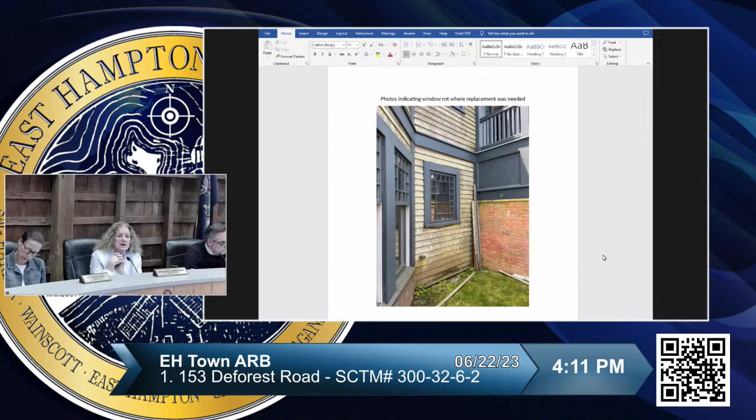The other piece of this that seems a little problematical is the patio. They're proposing to replace a brick patio with limestone, and it appears that that may be within the wetlands setbacks and may require a natural resources special permit. The property card seems to indicate that one has been granted in the past, so I think that's pretty much an administrative matter for the ZBA. But please come up and tell us what you've got.

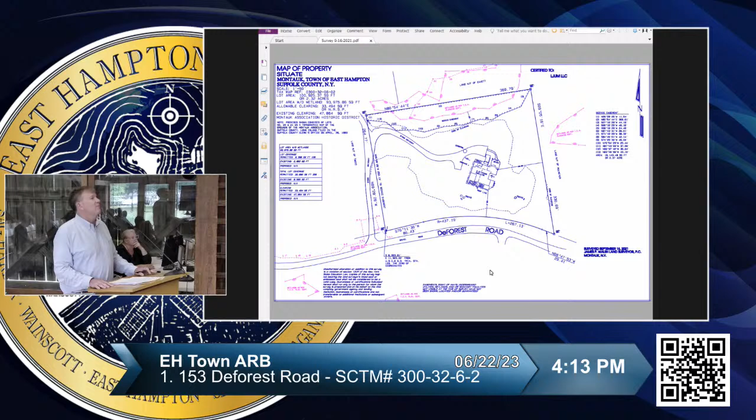It's inspiring in its own way. Just from learning from him and some of the other people, it's a very active area of architecture study even today. You're dating back to the 1920s and thereabouts, and it's still very, very active right now.

As I mentioned, Alan was very into classicism architecture, and he really revered the original designs. He had thoughtfully redesigned the house to be truer to the original vision of the architects as he understood it.

This property did have some extensive additions to it. They were done when the property was owned by Roberta Gosman Donovan, who was a former chairman of the planning board and probably other things, actually, when I worked for the town. I think the architect at the time was a guy named Francis Fleetwood. His firm is still up the road.

I recall Alan Greenberg had great regard for Francis Fleetwood, but he didn't like what the additions to the property had done. Essentially, the original vision of these properties is that the south-facing elevation, which is what you can see from the water, was going to be the banner shot -- what is remembered and revered. The north-facing elevation was designed in all the houses to be relatively plain.

If you look at it now, the pictures that you took show a lot of the additions and some of the features that were added. I personally think it looks beautiful, but when you start talking about classicism architecture and how it relates to the original, there's a lot of room for discussion on that.

As a matter of fact, I seem to remember Alan at this meeting said it looks gingerbready, which I didn't know was an architectural term, but I guess apparently it is.

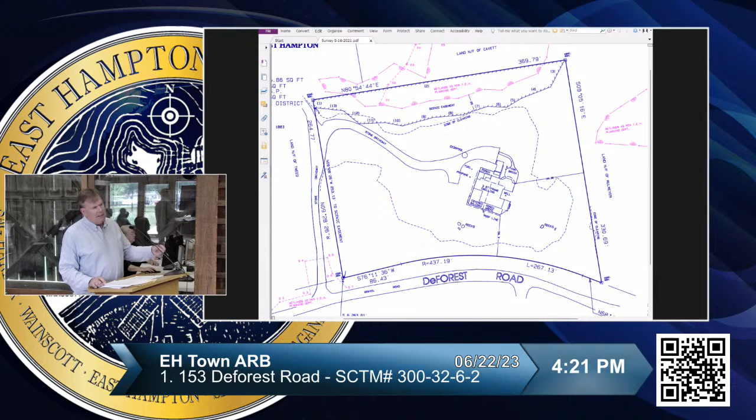The doors are all replaced, all non-historic, meaning they date back to 1992. All of the original windows and features on this building remain exactly as they were from 1992. I suspect some non-historic windows were replaced in 1992 on the south-facing facade, before there was a historic district, but I'm pretty sure these windows are nearly identical to what was there, which is why Roberta Gosman Donovan wanted everything done the correct way. Bob Hefner, when he was doing the district, noted this was one of the standout houses with most of the original elements.

Perhaps the single change we propose is the removal of the railing. There's a railing on the south elevation, and that elevation is the most important for the architect's vision at the end of the day.

Julie, can you bring that picture up, please? There's a picture that shows it. I think the picture you have now shows the railing removed, but I submitted pictures with the railing in it. Is it in the plans or in the photos? Both. There might be a side-by-side on the plans we submitted. Frank, you should operate the smart board.

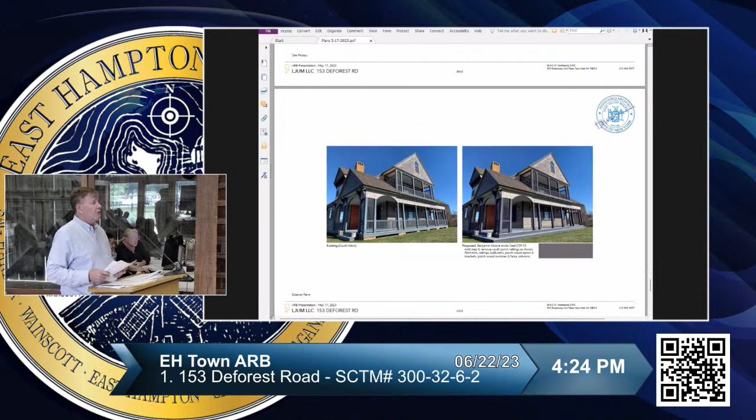So here's the side by side. That's the railing. The original balustrades were original. It's these railings that were not original, and they're proposed to be removed.

There are historical photos of the house showing that railing was never in place. The legal way to do it is by adding that step feature, which reduces the height to adjacent grade under the building code. It won't affect much since most people won't even see it, looking from the water at the south elevation. But we think it's a dramatic improvement of the overall structure and makes it more in conformance.

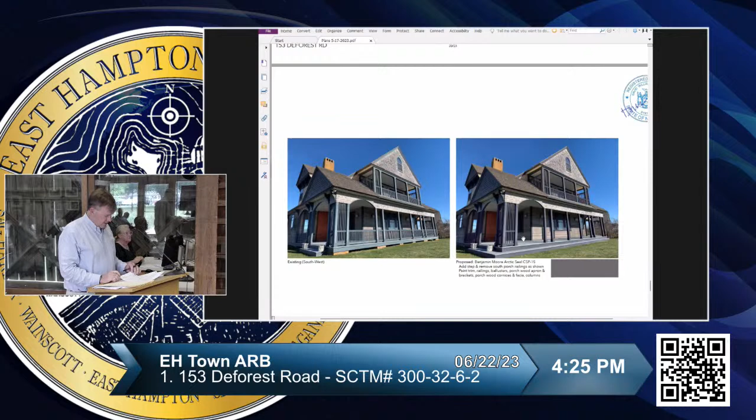Yeah, I'm trying to find it. Could you bring up the historic photos, please, Julie? I'm having trouble finding them... There you go. Yeah, so that is a historic photo of the south elevation. Can you zoom in on that, please? Because it's hard to see from here.

That's the south elevation, kind of from the east side. Yeah, it looks like they're standing on the east side. And that's from the southwest side, where you drive up.

It doesn't appear to have the larger vertical balusters. I believe they're actually white. I see a lower portion, but if you look just left of where you indicated, that other side doesn't have that taller portion.

I think this is going to the corner of the house, and you can see it here. Aren't they on either side of that entryway, beneath the gable? That would make sense.

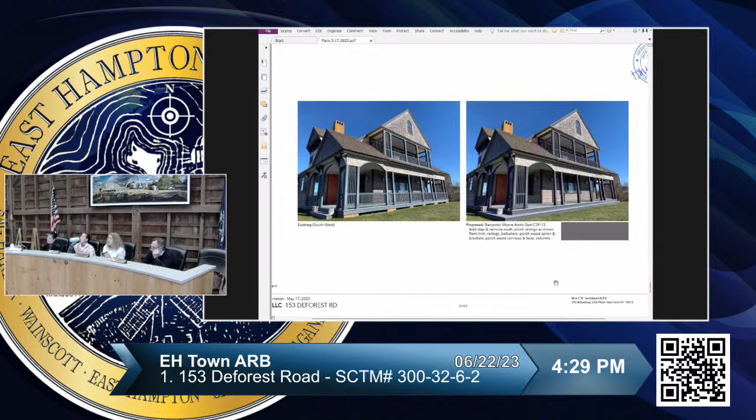I think they were lost in a fire, documented. The best source of information for most of this stuff, where we got most of these photographs, is the Montauk Library. So the earliest documentation we have of this is 1975. There has to be earlier pictures somewhere, but I didn't find them, and I don't think the town has any in the historical documents.

I like the idea of removing the lower railing, more in keeping with the historic nature of the house. Well, my question would be, what is the original? If this is 1975 and it doesn't have that spindle screen you see here, then what was the original? I still don't know that.

May I show you here? Yeah, sure. So this is your submission. So you can see this part, this element, and it's on the upper level as well. Where's the upper level here? Oh gosh, sorry, I can't see. Okay, and up here on the second story, these have... oh, she took it down. Can you leave it up please, Julie? We'll tell you when to take it down. These elements, the spindle screens, okay?

They're not in the 1975 photos. I think they are. No, look again. No, they're not there. You can see it pretty clearly on this side. There is something there, look here. There's space. I think it's coming around, and the second story shows it pretty clearly in the 75 photos.

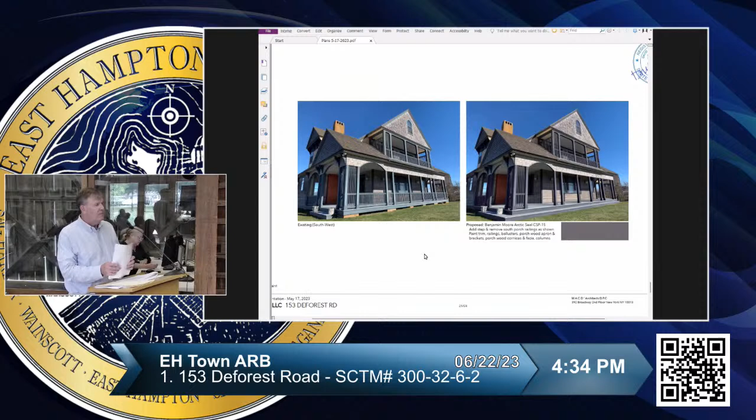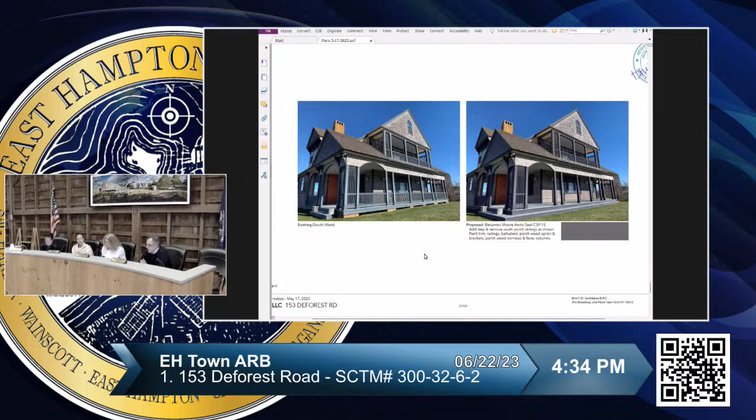Yeah, it's not that I object to what's being proposed here, it's just to make an informed judgment. I'd like to know what is original to this, and I understand the comment about the prior owner who did the renovations in '92, trying to be true to the original. I laud that, but there's no way, from our standpoint and our responsibility, to kind of verify that right now.

We're trying really hard to refine our review of historic properties like this. And the Montauk Association is probably the most important one we have, because it's still so intact and it has specific guidelines.

I know you absolutely appreciate that, Andy. On the south facade, if anything, the reason I've been told, and everybody I've spoken to said, no, those weren't part of the original construction. The reason why is because they detract from the architectural elements.

They don't add to the thing, basically these porches, and maybe we can find credence from some of the other properties. Those balustrades that you're adding detract from the clean architecture. They don't add any relevance to the structure. I think that picture that just shows the clean line without it...

I don't know about those side walls or the screen walls. I was made to understand those are part of the original concept. But once again, I don't think they contribute or diminish the importance, but removal of the balustrades definitely is something that I think is important architecturally under the district, because it does seem to be something most of us agree on.

We just need to find a starting point. So I think what we'll do is reach out to a historic preservation consultant. If it can be Bob Hefner, that's great. He's pretty much retired, so we may have to get somebody else to help us with this. In the meantime, I can get Joe Palermo's email regarding the NRSP, which was the other piece.

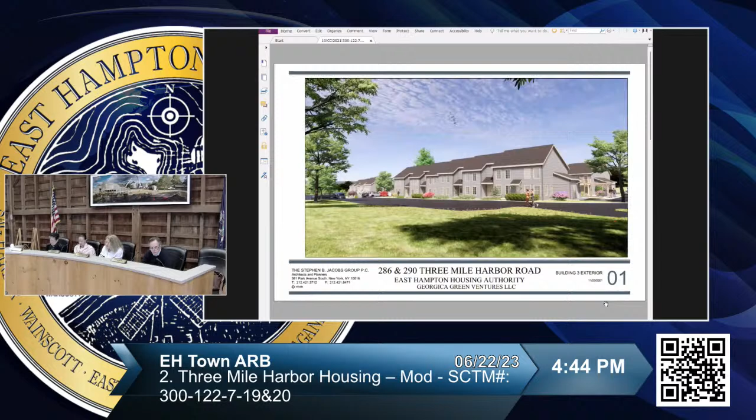So we just need to look at the proposal for the garbage enclosure, which is part of the submission we're reviewing today. Anyway, it looks like this. The approved enclosure was for a block wall with brick face.

And they're changing it to a poured knee wall with a vinyl fence. It says brown fence, so now I'm a little confused. It says brown in the submission, but Katie sent a memo that indicates this is supposed to be gray. I think if it's gray, it's okay. I'm just going to pass this to you because you can't seem to find it.

This is what they're proposing. Do you know the one I'm talking about, Julie? Can you just hold this up so she can see it? This is what we're looking for. That was in my packet. Sorry to grab that from you.

It's a very modest change, and I think it's done in part for cost savings. I think the vinyl fence in gray will actually be a little better than the brick. I think it'll blend in better with the proposed architecture.

Yeah, just show that to them. So they're proposing it in gray. This is the fencing, it looks like that. So they're going to just pour a wall, so it's a poured knee wall - basically cement, a low concrete wall.

Well, that one went simply. That's good. All right, business signs, Sunday Fun Day, Suffolk County Tax Map number 300-6-3-6.

I should say that there was no representative here from the Housing Authority because Katie and her entire board are meeting at this very time. Ordinarily, we don't entertain applications unless there's a representative present, but we did that at her request. And affordable housing projects are fast-tracked through the town's own policy, so we felt that that was cohesive and not against any of our rules. So just so we're looking consistent here.

Okay, so Sunday Fun Day, 300-6-3-6. Diane, this is you. Yes, this application is for 2 signs to adorn a charming ice cream parlor and candy store on Westlake Drive in Montauk, in that very charmingly commercial area.

Oh, you must be the - are you the applicant? I am. My husband is. Okay, well, you're the representative for the application. I am, because my son is at the East Hampton All-Star game. Oh, well, congratulations. Could you just tell us your name please? Nicole Meehan. Okay, thanks Nicole, welcome.

Okay, Diane. Yes, so the store is absolutely charming. Thank you. And this is an application for 2 signs that are in place. One is on the side of the building, with the colored picnic tables, which is very charming, and the other on the front of the building. The signs total exactly 32 square feet, which is our maximum, but they're in total keeping with the neighborhood, I think, and the space itself. I think they're very benign, and I think the spirit of the place is just perfect for the neighborhood.

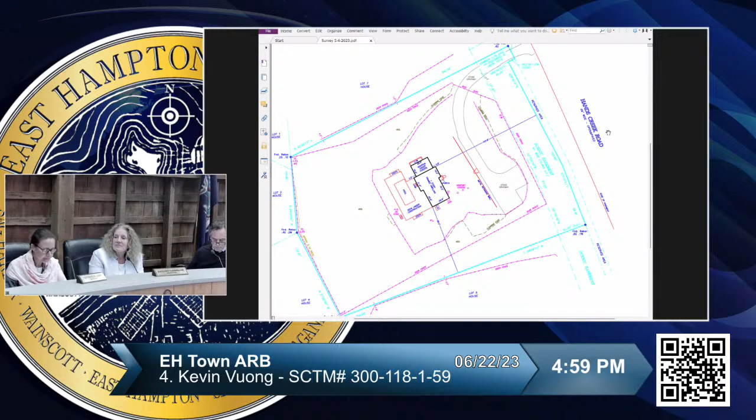All right, so that's from the middle of the road. This is the view toward the driveway and the gate, correct. You can go on to the next one. That's a picture of the fencing that's just inside the driveway gate, to the right of the driveway gate.

Sorry, so I just took photographs of not random things, but you have uplights all along some of the trees, and those are not permitted. I just wanted to make you aware of that.

Is that just on the front yard or also in the rear yard? Anywhere. Okay, I wasn't aware of that. I thought there was a limited amount allowed. Uplighting though is not, as far as I know, limited. I don't know. Well, that's my understanding, that no uplighting is permitted.

David, can you help us here? I don't know, there might be certain exceptions, but I think generally speaking that uplighting is prohibited. You could reach out to the planning department if you have specific flora and fauna concerns. I know the trees lit up look very pretty, but it does confuse the wildlife and the vegetation.

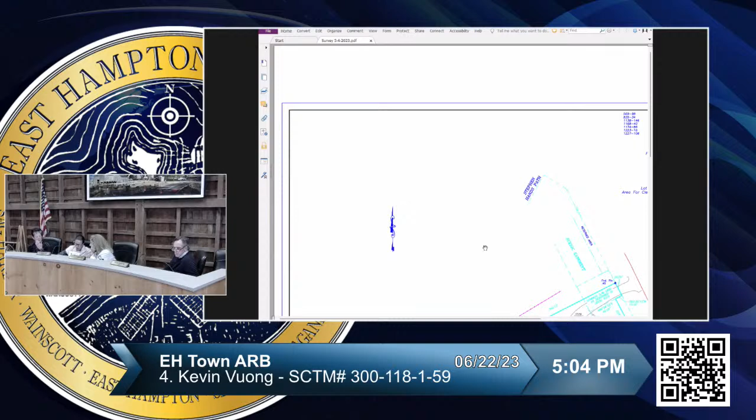Well, that doesn't make any sense. Are there any restrictions on this property? Dan, did you get a chance to look that up? I know there are approvals here. Yes, we looked through, there was an easement with the original subdivision, and it didn't have any restrictions in terms of where they were, except in the rear, nothing could be built within 30 feet except for fencing and gates.

Okay, and in terms of the scenic easement, it said as long as nothing's constructed within it, but town code just had to be 10 feet back except for fencing. The easement runs along here, so this would be 20 feet from the property line. Setback property 20 feet. Now how deep is the easement? I think 40 feet. Or no, sorry, 20 feet. So that encompasses the easement.

That approval was 2018? Apparently 2003. Well, that's long gone. Okay, Suzanne Phipps Morehouse, plastic mesh deer fence granted provided... a lifetime ago, I know. We have a fence that's 20 feet from the southeast property line. Then this is Hyatt 2018, two sheds, and the 7-foot 6-inch high fence with a setback from the southeast property line per ARB decision, and legalizing... yeah, there was a generator on there too, which I was going to ask about, but anyway, okay.

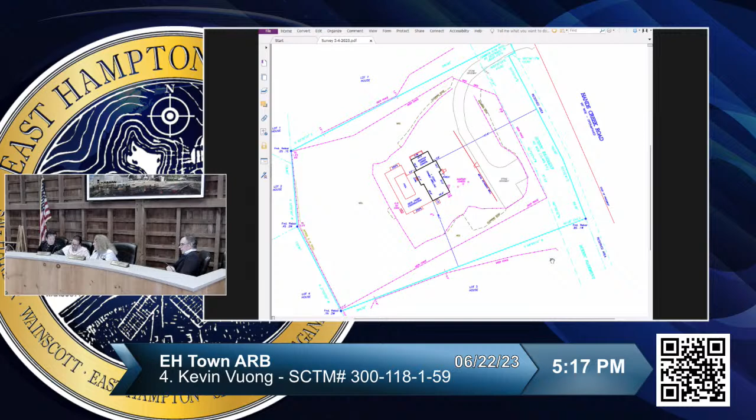This is the roadway, the gate again is -- oh, what height, right, I thought this was the edge of pavement. 6 feet, this is edge of pavement. Okay, so I'm just wondering if that's legal. Yeah, I get it.

If the existing gate as built, which part of it has a component of a fence, it looks like - I'm not advocating for it - is it legal that you bring the fence 50 feet back from the pavement?

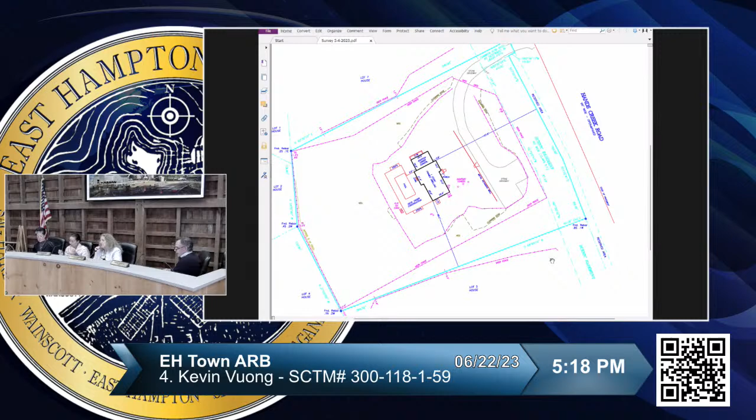Another piece of code - yeah, this is very confusing. I'm sorry this is taking us so long. I think we struggle with that. Well, this gate by itself was a standalone thing, and it was just 6 feet.

Sure, but it appears that it's connected to some deer fencing, right? Or it will be. And so if that deer fencing is illegal or not allowed, then that is also an issue - for instance, if it's the wrong material, the gate would be included as part of that fencing because the gate is a component of the fencing.

Let's just wind back the clock here a little bit. Usually we look at a survey and it says existing and proposed. So you have already built this fence, but you had an approval for a fence that you have removed. So we have no way of knowing where that was on your property.

Is that right? Yeah, so this gate was existing when I purchased the property, but it was in the easement. When the owner sold it to me, how she got the C of O is she simply removed the gate. So when I renovated the driveway, I took it upon myself to move it out of the easement and basically reposition the same gate where it is now, just outside of the easement. Oh, that was smart. Good.

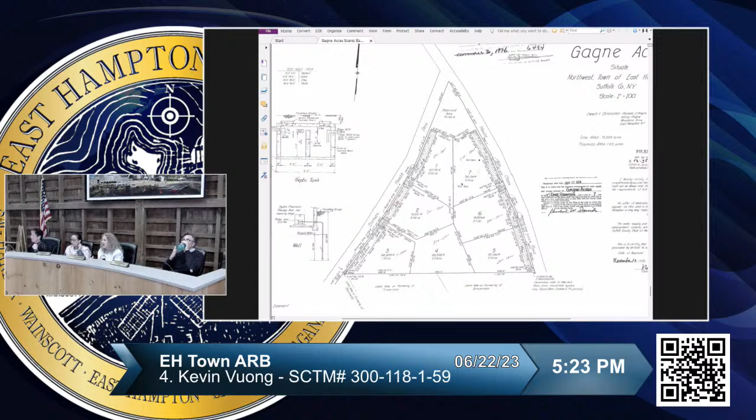Some easements permit fences and some do not, and yours does not. So if a fence was approved, it was approved in error, and we can't sustain that error — we would have to correct it. But let us go back and see if we can unravel this knot a little bit.

We'll get you on as soon as possible. I know you've been waiting to get this done. We'll try to get you on for next time if we can get the information we need. So I'll have to come back to another hearing. I'm afraid you will, yeah.

Just to correct your notion, the Architectural Review Board has no variance power — you wouldn't be getting a variance here, we would just be approving or not approving something you submitted. Thanks for your patience, I'm sorry it wasn't more productive, but we'll get back to you as soon as we can.

All right, we are on to item 5, D'Amelio Garden, Suffolk County Tax Map number 300-119-4-6, which has been postponed by the applicant. Number 6 is Victoria and Albert Carey, Suffolk County Tax Map number 300-87-3-2.2.

This one's mine. Hi, you're back. Oh, you're recused from this? Yes, you are. 260 Old Montauk Highway. You're back. Dan Thorpe, nice to see you. Nice to see you guys. Thanks for having us back. Thank you for having us back. Oh, yes, it's our pleasure.

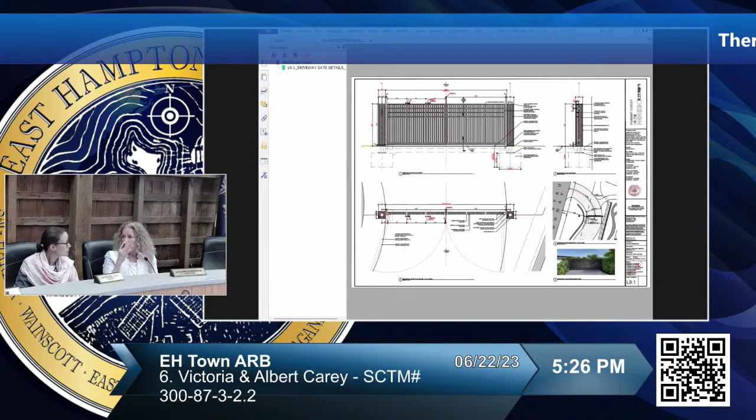So that's great. If you could just go to the plans, Julie, and show the gate that's being proposed. This pillar measures — I have to check my notes here — I think it's 74 inches high, and it was 8.5 inches wide, but the builder told me another 3/4 of an inch would be added to the volume, so it'll be 9.25 inches wide.

So that's the gate. Now, the plans indicate that this is 5'10". I thought you guys were going to come back with a shorter gate. Weren't you going to do that?

Transparency - is this 50% transparent? 55%, to be exact. Okay.

So this is a 5'10" gate, correct? Correct, yeah, so it's just 2 inches under 6 feet. And it is in the front yard.

Part of the confusion here was that we directed the applicant that they did not need our approval for a gate in the rear yard, mistakenly advising them that the front yard is the ocean side, which is not the case. Our code is a little confusing in that oceanfront properties work the same as anything else, and the Stillwater properties are not like that. So we all learned something there. I'm sorry it was at your expense.

Anyhow, this gate will be perpendicular to the road mostly. It takes a little bit of a jog to the east - I don't know, 15 degrees, something like that, would you say? Yeah.

And I think that it will not be visible from the road. I think the 55% transparency is okay. I would prefer it was a little more, but I'm inclined, because of the length this has taken and the expense that the applicant has gone to, to approve this gate as submitted. So I'll be happy to entertain any questions. If you have something more you would like to add, please feel free.

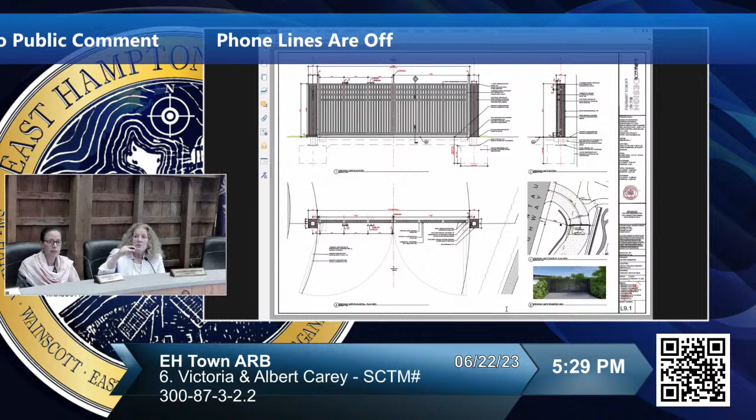So they get cut and capped. Yeah. So what's the height of the pillars ultimately? It'll be the same, matches the gate, 5'10". It'll be 5 feet 10 inches, to match the design of the gate.

Yeah. We really focus - it's 50 feet back from the street as you come around the curve, a little shy of that, 46 feet from the edge of the street. Oh, you mean as you come around the curve. Yeah. Okay, well, that's not how we measure it, but right, yes, I get it.

But sightline distance, and then it's down elevationally, 2 feet from the edge of the street. So yeah, the whole thing is built into the bluff. It all goes downwards, rotated perpendicular to the road. Maybe find some more of those photos, Julie.

It's also very densely planted. I don't think it'll be visible from the road, frankly. You might see it just briefly as you're heading west on Old Montauk Highway if you glance in, but you would really have to look in to see it.

Maybe this doesn't show that. That's the southernmost pillar. Flipping through. Yeah, I tried to take something from the property. Oh, go back there. Go back to the one before it. See if you just stop there a minute.

See, that's a car going by on the street - you can hardly see that. And that's the pillar that's closest to the street. And I'm standing roughly where the gate would be, or a portion of the gate would be.

I really don't have any problem with that.

All right, so I'm still not exactly clear on the dimensions you gave me - 74 inches versus what I measured on the pillar, 5'10". Okay, well, the builder told me 6 inches less, but that doesn't comport with the plans. I think it's 4 inches less - whatever 5 feet, 60 plus 10 is 70. Yeah, so it'll be 4 inches less. Okay, 70, the difference of 2 inches there.

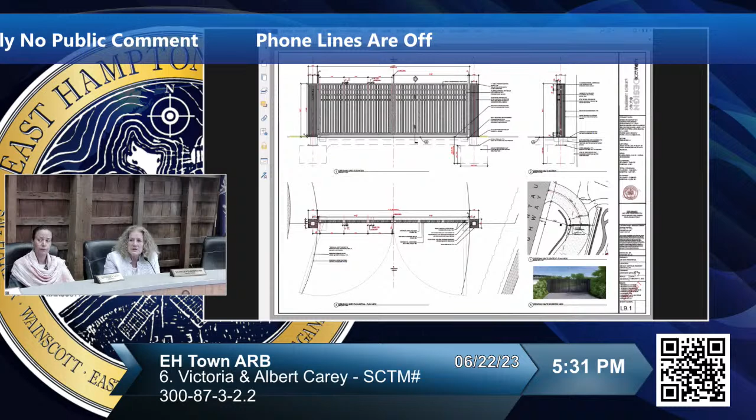Can you show us the rendering, please, Julie? I don't think the rendering is the same as what you submitted, though. What is that rendering, or the photo? Yeah, if you can enlarge that. That doesn't look like it - there was another one, or it's missing some of those horizontals, I think, right? Can you enlarge that?

I understand the spirit of the code to keep the open vistas for the public. When you first turn off Old Montauk Highway into our driveway, because the gate's around the bend and turned almost perpendicular to the street, your open vista is still down to the ocean, because of the elevation change. So if there was ever a case where this is not in direct impact of the public vistas and getting that deep view down to the ocean, this is one of them.

I know it's not the board's fault, but the builder did proceed with building the gate piers out there on advice received from us in the planning department. I understand that.

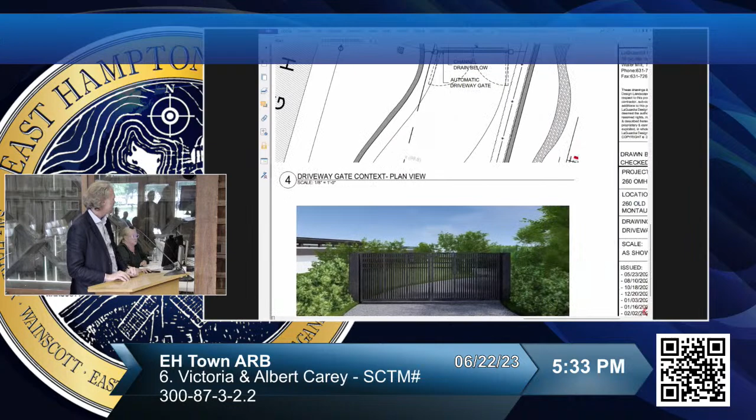Is it on the plan? Yeah, it's on detail 4. David, if you scroll up, pan up. There you go. Is it on the survey? Right there, I had trouble with the survey.

It's not on the survey. What is that? Well, it needs to be on the survey, which I cannot read. This survey is so tiny. Do you have the survey there that you could blow up or zoom in on, Julie, please? Is it on the survey? That's required to be on the survey. That's the most official document.

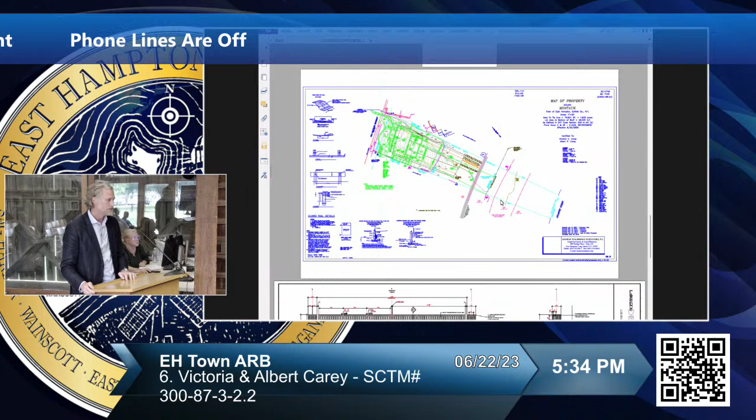Can it be a condition of the approval? If it's not on it already, yes. Do you think it's on there? It's on the submitted site plan. Yes, but it needs to be on the survey. I can't read this survey. Can you enlarge that, please, Julie?

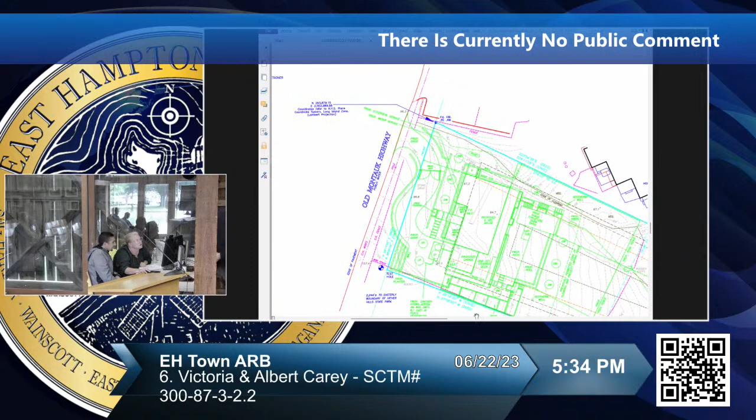Wow, you're getting there. So here's the driveway? Yeah, there's the gate? I don't see it on there. Okay, so you'll have to add it. When the building permit comes our way, we can make sure it's on there.

Well, you won't get your C of O without it. So we really shouldn't be approving it without it, but I would make it a condition of approval. Thank you. Do you have anything else, Mooney?

Diane? Okay, I'm going to make a motion to accept this proposal as proposed, and the condition of approval would be to include the call box on the survey before a certificate of occupancy can be issued.

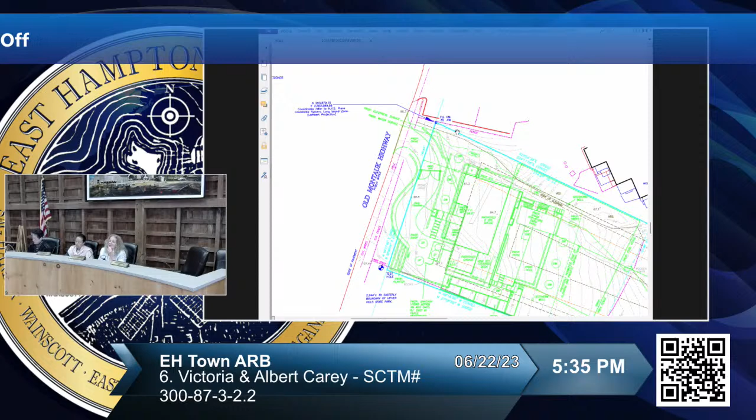Now we're going to an extension of time for the Peconic Land Trust. Suffolk County Tax Map Number 300-149-3-3.4. This is to extend the approval of a barn that was built on the Peconic Land Trust building at 293 Town Lane, which is on the Balsam Farm land. The appropriate forms have been submitted. The approval was issued in 2016.

There was a lot of mess with this. The planning board approval was issued until November 18th. COVID restrictions came into play, so the approval is very old and they are looking for a certificate of occupancy. The building's been built. We're going to issue a C of O today, but it came to my attention that the approval had expired, it was 4 years out of date. So we have to pass an extension of time for that approval before we can make the C of O valid.

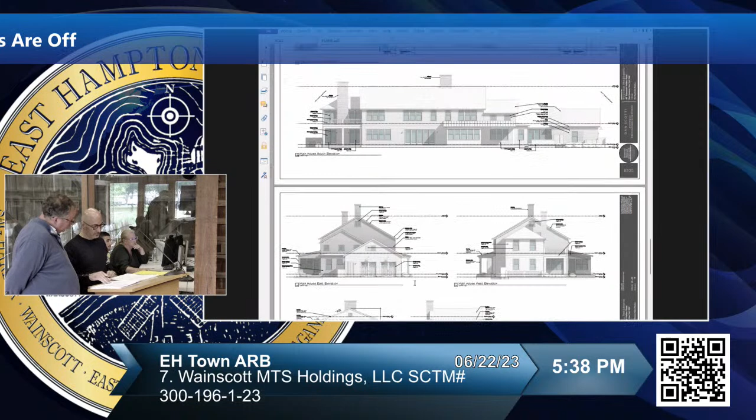The main house is proposed at 7,359 feet, the pool cabana at 918 square feet, the spa terrace at 3,150. The gabled roof is to the maximum of 32 feet. The total lot coverage is just 33 square feet short of the maximum 24,000 square feet allowed.

Plus, there is a huge, fully tricked out lower level or basement with 4 bathrooms, a media room, a billiard room, several bunk bedrooms. The first floor has 4 bathrooms. The second floor has 4 bathrooms. That's 12 bathrooms on what was once agricultural land that, of course, didn't have any bathrooms.

No bathrooms, right. Or it was one big bathroom. It was one big outhouse. Yeah.

It is promising that there are no gigantic windows or fenestrations, and the yellow cedar shingles and the brick chimney and the trim colors are all very much in keeping with the feel of the older part of the neighborhood. But everything is maximized in every sense.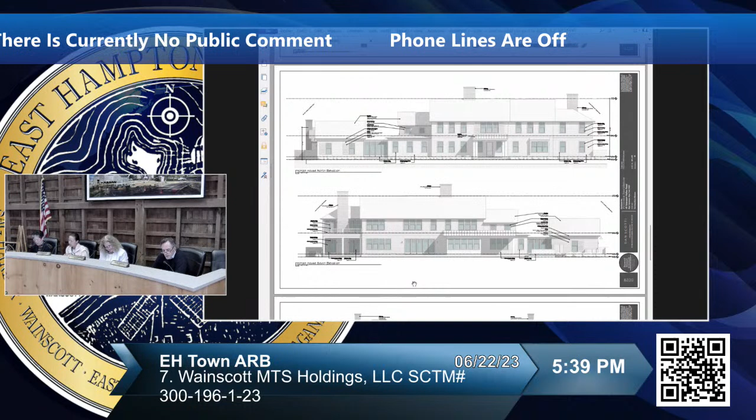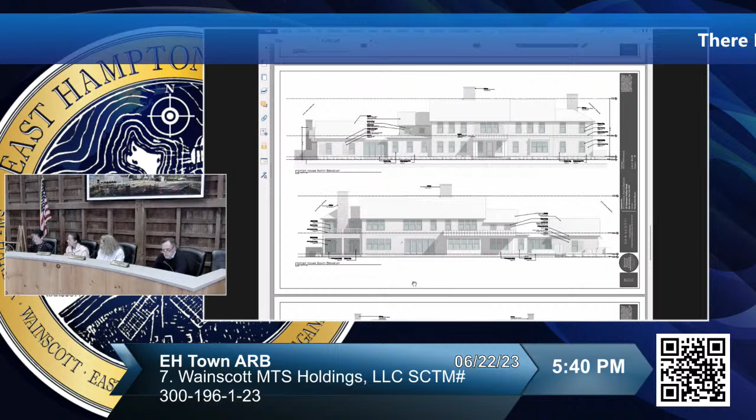And I think what is disturbing, with the one house that has been built already, is that we risk this line of new homes becoming like a really high-end suburb. And that's really sad. Yeah, that's a very good point.

This house is, I appreciate the thought you've put into making it sort of compatibly quiet in appearance. But of course, well, there's the one that's been built. It's not quite finished. And I'm not sure, is that one 32 feet high too?

I think that was reduced. I don't think that one's 32. And this is the lot that's closer to Wainscott Hollow Road? No, I think it's on the other side, 2 lots further in. That's lot 4, not the last lot in, but the third lot. This is the second to last. That was lot 4, 32 feet height. This is lot 6. Correct, I see, this is lot 6.

So, it's long and deep and it's filled to the brim, and it will have pool, tennis court, all of that. Oh yes, everything you can imagine is in this house and on this land, everything. So ultimately there's going to be 5 houses on this side. Yeah, so that's, it's, yeah.

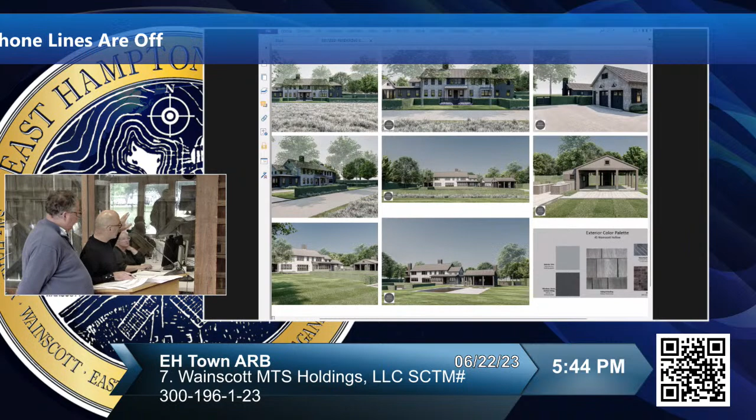Yes, it's true. Everything, all the numbers that Diane went through were all perfectly accurate. But it's important to recognize that we took care to graduate the building height and cascade it down.

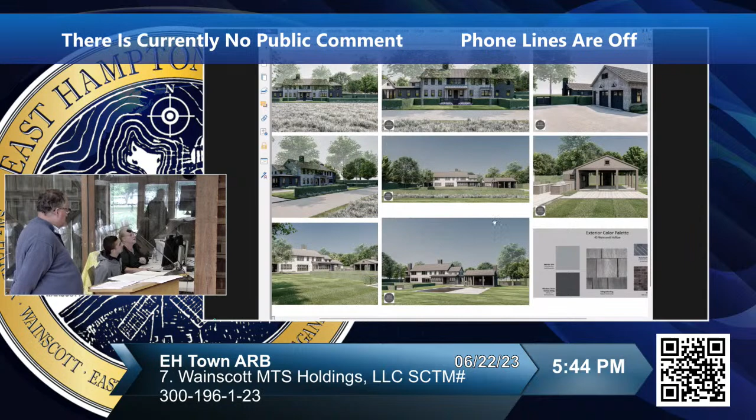On the gable ends. So, for example, can I approach the screen? Yeah, sure. If you look at... can you zoom in on... can you bring up the different elevations, and we'll just look at the elevations sheet by sheet?

If the ceiling heights are low, what? How does it? I don't know. Yeah, I don't get it. Perfect.

Okay, that's perfect right there. Maybe the one that has the full front elevation to the left of that.

There you go. I appreciate the sensitivity that has gone into this and what the client might have wanted. I appreciate that you've put a real feeling in, and you've tried to deflect everything that we are going to object to. I see it and I feel it, but it's still really big.

This is the second of 5 of these houses, and I question why I would want to live so close to another one. It really feels very crowded there.

So to address the height issue, there's 32 feet in elevation in the main body of the house here, but then it steps down a foot, all the way to 26.5 feet on this roof line. This roof line here is 12.95, and above it is only 25. Then it steps down to below 11 for this flat roof connector.

And the inspiration for that was buildings like the one we're standing in today, a simple gabled farmhouse. This is a 5-bay farmhouse connected to another gabled structure by a flat roof volume, which is what we've done here. And then this garage, which has been incorporated into the volume of the main house.

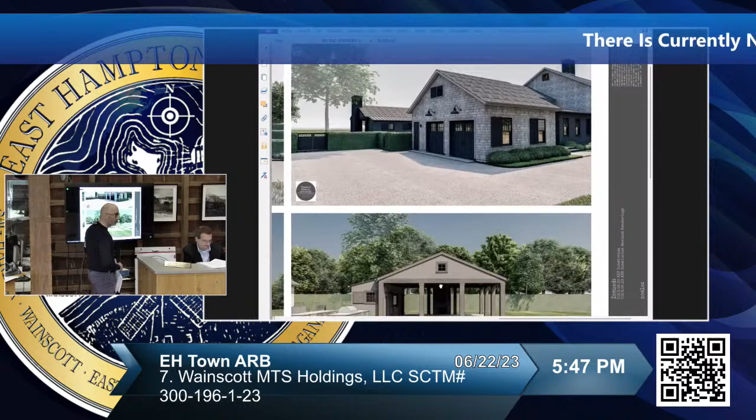So you'll have Alaskan yellow cedar in the main body of the house. And on the volume that's on the west, we're using barn board vertically and horizontally, painted with this beautiful railings color from Farrow and Ball. The trim is not a stark white, but a soft Cape Cod gray meant to blend in with the weathered cedar. The cedar wouldn't be treated, painted, or stained; it would just be left to patina naturally on its own.

I'm having trouble understanding the program and the connector between the garage and this. This is the garage here, the garage doors are on the east side. Right, this connector here is actually the mudroom volume. This little hipped roof structure here is a laundry room.

I see, I can't see that so well from here. All right, so there's actually 2 units there. Yes, yeah, this... okay. The laundry volume sits slightly proud of the connector, which is the mudroom. And then moving to the west, you have the dining room, front entry, and then you get into the guest wing.

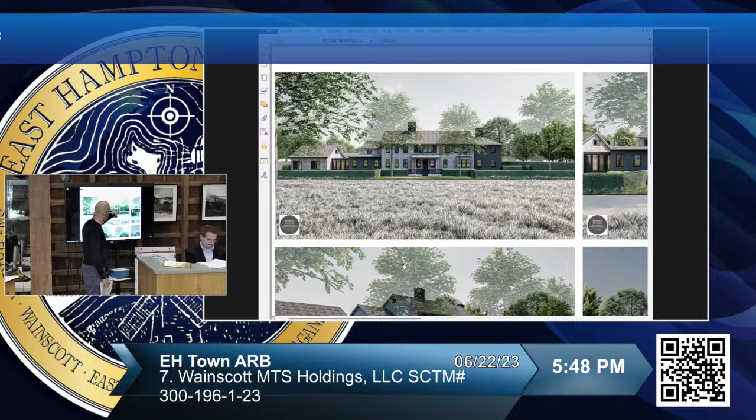That's the first floor guest wing of the house, which is what's on the front. And then this is the primary bedroom suite on the southwest corner, and then you have other bedrooms. Yeah, no, I see it here on the plan, I just didn't understand, I couldn't tell from looking at it from here.

I think part of the problem I'm having in terms of the massing is that there's so much across the front facade.

Let me backtrack and say I agree with everything Diane has said. The materials you're using, the number of windows, you've clearly taken into consideration the things you've heard us saying in the past, and I'm grateful to you for that, because it's not always the way, we often are butting heads with people. But we're meant to be reviewing massing and how this is going to fit into the local community. And I think Diane's point, which is excellent and one I hadn't thought of in quite this way until she articulated it today, is...

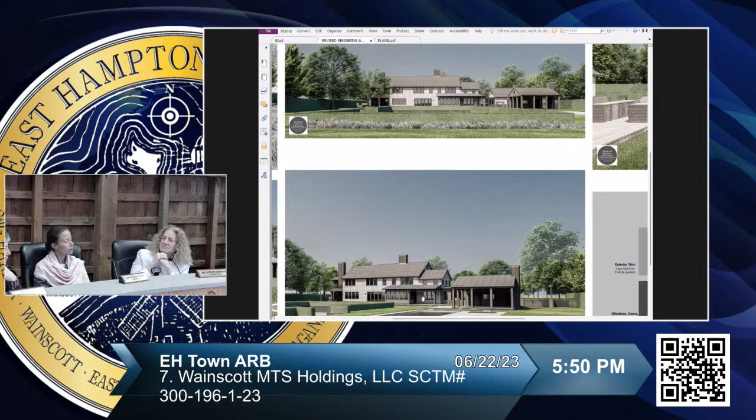In making this subdivision and having houses of this size, it's just going to be a string of them, and it's got this weird... my concern is not necessarily the house, it's how the house fits in with what else has been built and what is on the table.

There's another application on the table, not yet approved, for the lot next to it. Can you just scroll down a little, Jewel? Just scroll down so the one at the top. I'm sorry, scroll up to the top. Sorry, I said the wrong way. Yeah, that's a good visual for me right now for what I'm trying to say.

The concern I have, if you would please... Go ahead, Frank, I'm sorry to interrupt. Kind of echoing what Kathy is saying, the view across the field, which is south, southwest of here, is kind of visual. What I'm concerned about is how this compositionally is going to be seen by the public.

My concern, and I don't have a yes or no answer right now, is that it's almost no fault of your own, but the fault of the first development that was built. We don't know what's going to be built between your lot and the other one, but it's safe to assume the pattern of development is house on the north side, outdoor activities, pool house, pool to the south. You look south, and it's natural where you put that program.

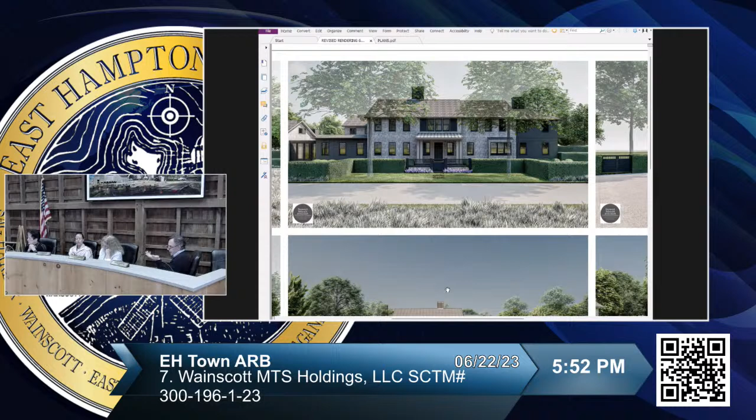So I'm wondering how we mitigate that without you having to go back to the drawing board, which is something I don't think is needed given what you've come up with. I agree with Diane's sentiments and what other people said about the architectural merits of what you're presenting here. So perhaps just about the design of the building...

Could you just come closer to the mic, please, sir? Yes, Raymond Renault, architect. Thank you. So one of the things you'll notice about the building we've designed...

Is there are no gables facing the front roadway. We were very sensitive to the reserve. We felt a softer approach would be gables facing the side yards. In fact, you really don't see many of those gables because of the reduction and setting back of the volumes. So the scale is being broken up by those setbacks, and even the colors and materials at the same time. That's what I was getting at, just wanted to point that out.

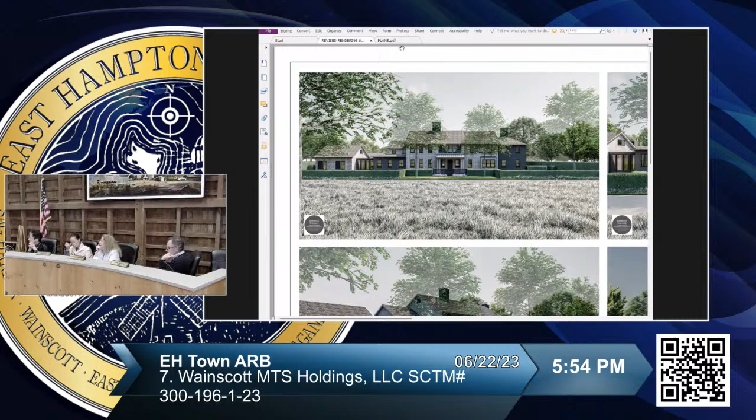Because you're going to kind of see the outline, and you're using a different color palette on the left wing, I'm going to call that the west wing. Sure, I'm just throwing it out there. Let's go to the first page, the site plan, page one, and kind of zoom in on it.

Yeah, just give a little bit of zoom there. A little bit more.

The one massing volume I'm a little worried how it's going to tie in with the rest is the one west of the main living volume, which is the two height. This is the double height, which is two stories, it's to the roof, it has its own roof, to the left of the main roof. 6.5 with the hip roof?

Yeah, I'm wondering if you were to take some of the upper floor massing, without looking at the plans, and put that down and move it out into the lawn, that would sort of reduce the visual massing at that lot line. It would lower it, and it might make it more palatable to the board. Do you know what I'm saying?

So if you're, and again I'm not saying you need to do this, but I think it's working on the east side, which is what you've done there. You've lowered roof lines and made a lot of one-story volumes. Is there a way to reduce the massing of that?

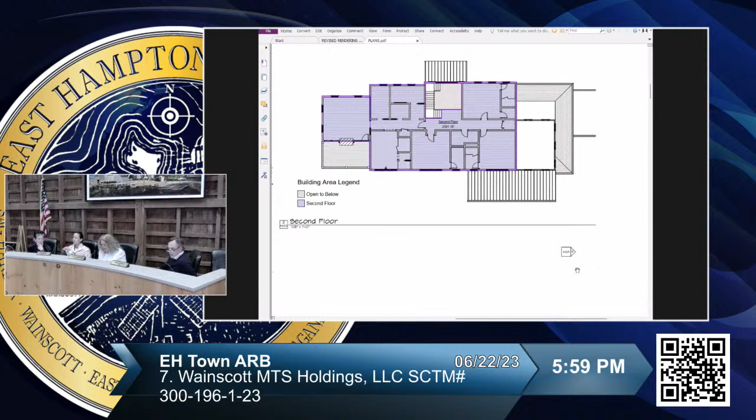I do like how the garage doesn't face the street, it's not a snout house as they say. But I'm thinking if there's a gap, is there a way to...

More, is there a way to just... We did try, there isn't enough depth to do a detached garage, but we did try.

Well, I guess my comment overall is, is this just a way in which you can move off the west lot line?

You appear to be 35 feet from the east lot line. You're comfortably not anywhere near your principal setback on the east, but you're within a couple of feet on the left.

We shifted everything to the east with a minimum turnaround distance for that garage. So 35 feet includes a 3-foot privet hedge with about a 32-foot turnaround navigating that entrance to the driveway. We started by pushing everything to that easterly property line, and because we stepped the roof line down, we're several feet away from the pyramid issue.

Yeah, and also pushing the volume further back. We pushed it back as far as we could.

Is there anything you can do with the volume of the connector piece, with the mudroom? That's a real program—unlike in other projects presented to you, sometimes a connector is just an architectural visual thing to separate two volumes. This is actual program; that is their mudroom.

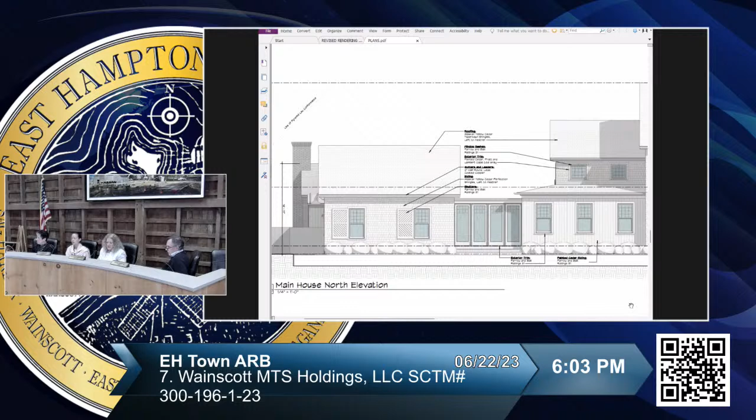Isn't there any way to bring it around the back more? Isn't there any way to just shrink the entire composition, which is truly—massive, yes.

There are certain proportions that work for functionality. The garage is currently 24 feet deep—that's a typical two-car garage. There's no question you've got to have a garage and a turnaround that works.

From what I'm hearing from other board members, is there a way to make something of the program of some of this large house find 6 feet in the overall width? I don't know if that's going to make it—it's not going to make or break it for me, but it could be a substantive difference. I think everybody's—

Just imagine these 5 houses—it's a wall of houses, this wall of these facades of houses, as nice as it might be.

I feel like we're being penalized for not being first. No, I don't think that's it. I don't know, this is much friendlier than the house that's there now. It's much—no, it's, I mean, yeah.

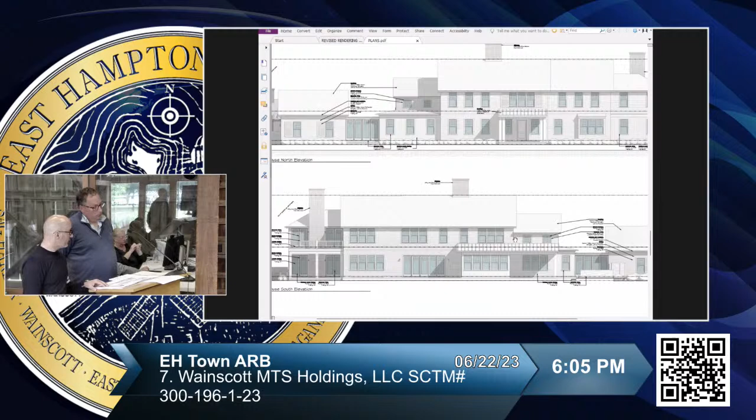And they really are great clients. We've been working with them for several months to try to present something that fits within the community. We understand the square footage is not insignificant, but we took a lot of time and care to design a home that appears much smaller in mass and scale than it otherwise could have.

We recognize your effort, and I know you're dealing with a client, but part of the feedback you're getting here is that the massing is too much. It's just too much massing. And that is our purview.

I hear what you're saying, and we respect you all very much. But I almost feel like we should have shown you an earlier version of what we had, because we've taken so much time to get to this point where we shrank the roof lines, graduated and stepped down, and changed the materials, and reduced the fenestration.

Yeah, I'm sorry. I can hear what you're saying - you worked really hard with these guys, you tried. I understand that's what you're saying. And I think we like the design, we like the materials, we like the fenestration. What we're asking is, can it be a little smaller?

That's what we're asking, and I'd say more than a little - it should be smaller. Even though you've done it tastefully and thoughtfully, it still presents as a big horizontal mass along the street.

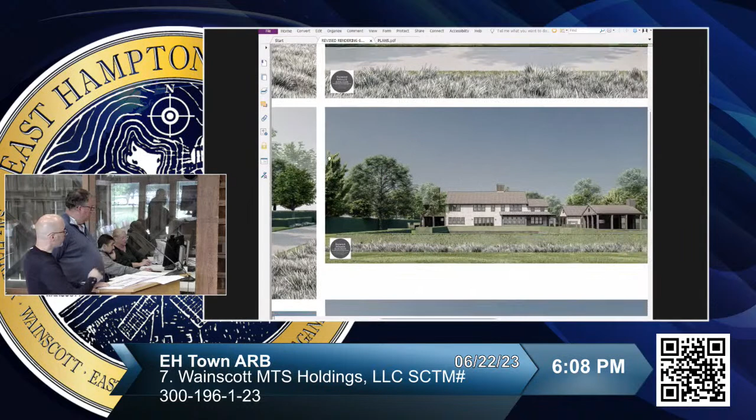Look at the rear elevation then. We've been talking about the front elevation for 20 minutes, and it's really the whole mass - you read the massing from both sides.

Yeah, for me the massing from the rear isn't much better. And by the way, there's an ag reserve just across the way there, and I've been through there, and you can really see this area.

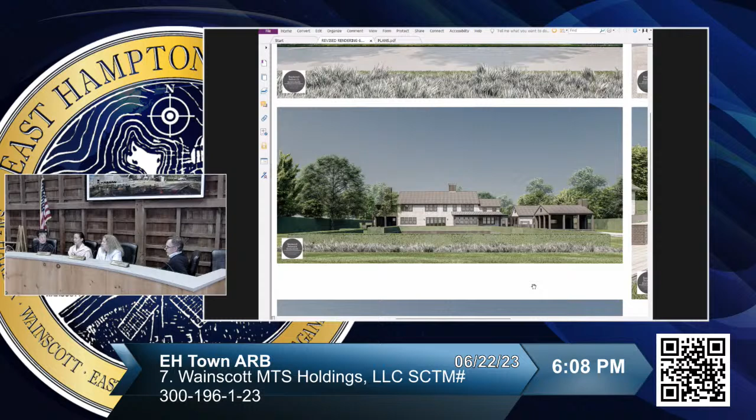You can see it even from Sayre's Path. This is very visible, not unvisible to me. Again, I'll go back to it - somehow it's the massing of the master suite on the west side.

If that were somehow put somewhere else, or even brought down, I think it would reduce the massing of the length of that, because you'd be stepping down. And it's how that's read across the field.

I realize you don't see it much right there, but that's a deciduous tree that's going to be barren in 6 months. So for me, it's just that master bedroom volume up close to that lot line, from a massing standpoint, that I'm having an issue with.

Do you have the site plan that shows the single driveway serving all the lots, 4, 5, 6, 7? We have that as part of the subdivision map. Well, because on the property card it says no CO of any construction until the common driveway has been constructed in accordance.

Lots 4, 5, 6, and 7 share a single common driveway as shown on the map. It's shown on our site plan. Did I see that?

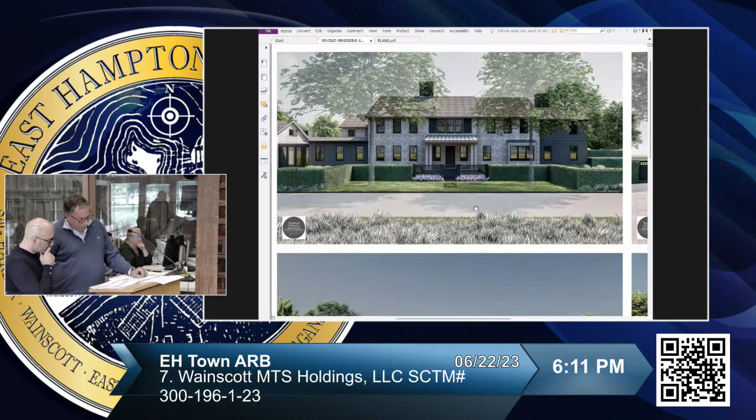I don't have an answer to it, but I still feel like it would be better than this. I apologize for not being responsive on this. It's just, we know what we've gone through, and what the sort of program wish list is.

No, I understand. You're between these two forces - you've got to be responsive to your client and you have to be responsive to us, but we have to be responsive to the community. And the community has set standards, and we're appointed to hold those standards in place. So I have a lot of empathy for you. I used to be married to a builder. I get it, I know how that works. So it's difficult.

Frank, so you're suggesting just taking this off, if there was a way to just move the program around? I still don't feel like that moves the whole thing back.

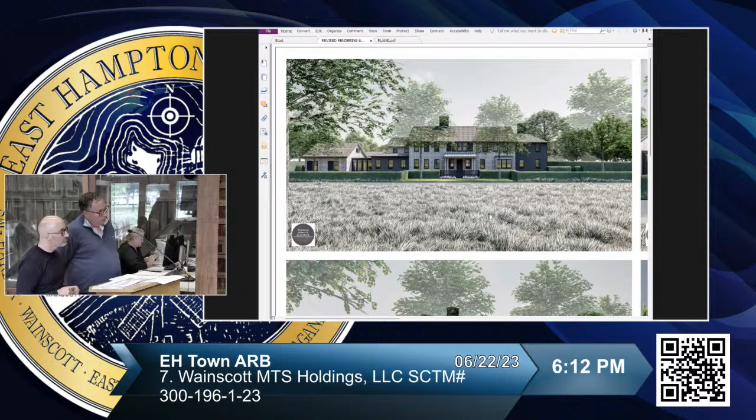I mean, does it have to be this 50 feet from the tennis court? Did you say that? Yeah, that has to be 50 feet - that's one of the, well, I think they added a little bit, right?

It seems to me even if you played with the length and the width of the tennis court to maximize it - undersized, yeah - so that the house wasn't in the same exact plane as this house that exists already.

Right, because it looks to me like that's one element. Better to keep it closer, because if you push it back another 30, 40 feet, whatever it is, 20 feet, it's going to be more visible from Wainscott Hollow.

I don't think the problem is that visibility, because it's still big, no matter if it's 20 feet forward or 20 feet back. I don't think that's the least of it. I don't think that would affect its visibility from Wainscott Hollow, but I think what Diane is suggesting is...

it's a very suburban look, which isn't our look here, to drive down the road and have all the houses right up against the front property line. It's not what we do. It's not granted this is not a public street, but that's correct. But the point is, it's the look and feel of that, and this is ag overlay, and we're meant to be - you've got all the other pieces right.

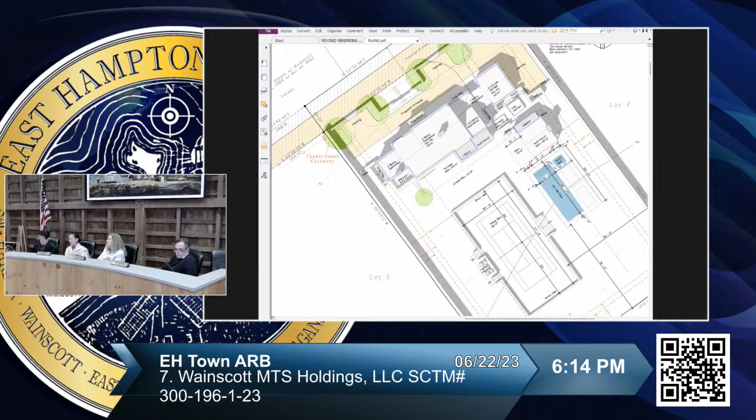I want to keep emphasizing to you that you have many attractive design features here. I just think it's the mass - and I say mass with relationship to the size. It's the front facade stretches, it feels like it goes from property line to property line. And I know it doesn't specifically.

And I see what Frank is saying about the second story on the master suite. But I still feel that even if you took the second story down, you still have that first floor look of building that stretches along the road. That's what I'm having trouble with.

That's why I was suggesting - I know the mudroom is part of the program. I'm saying if you could eliminate that and make the garage freestanding, I felt like that would help. But I don't know what other people think about that idea.

I think anything that breaks up the massing helps. Well, that was the reason I was suggesting that. I don't know if it can be swung to the back rear of that. I forget what else is there - it's the laundry room, right? Yeah, the grayer portion with the higher roof and windows. But I'd have to look at it.

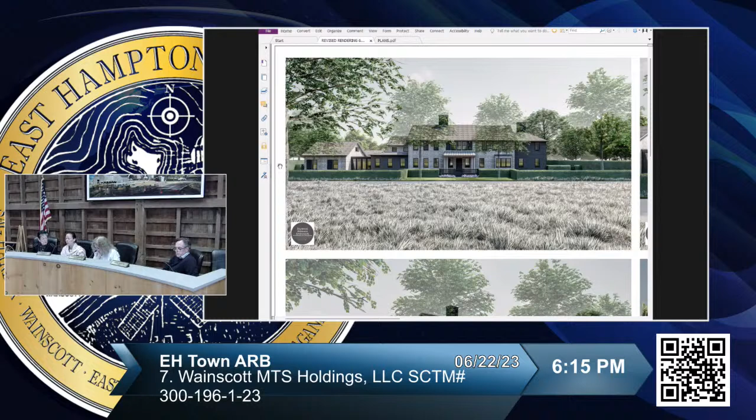I had a question about the 32-foot roof height. You were saying that the doors and windows and such are not oversized or tall, and that the ceiling heights are also not tall. So what accounts for the 32-foot height in the center?

So we have a 7-on-12 pitch on this roof, which is very pretty and consistent with what you see in the older turn-of-the-century farmhouses in Wainscott. One of the dead giveaways for new construction is when you see a flat roof line. So we wanted the 32 on the main body of the house so that it looks like that portion of the home has been there for 100 years, like maybe this was the first farmhouse on the land before everybody else built around it.

I get that it obviously looks like a new home. Well, not only that, but there's no farmhouse that would be of that size, so I think that's a misnomer. A flatter pitch on the roof would not be as aesthetic.

So if it were a much smaller volume, perhaps the 32 height wouldn't be as dramatic. This is what I'm getting at. It's also the fact that we didn't face any of the gable ends to the reserve, which makes the 32 feet - whether it's 31, 31 and a half or 32 - kind of irrelevant, because from three-quarters of a mile away you can't tell.

Typically, I have less problem with the 32-foot height. I don't mind the 7-12 roof pitch. I'm having trouble with everything in this horizontal plane. I know you've stepped it back and it isn't all right in a straight line, but it still looks that way, and if there's any way to break it up...

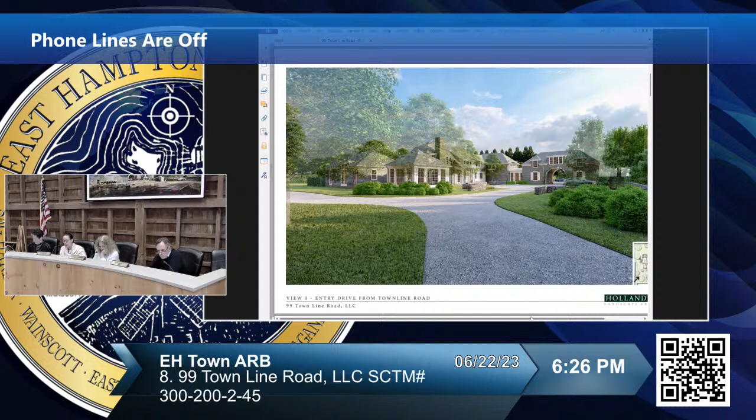The description of the existing structures, I would add that there's a gravel tree bosque. In Spanish it's pronounced bosque. I find this word very funny, it comes up all the time lately. So all is proposed to be demolished with the exception of swimming pool, patio, and tree bosques, which are to remain.

Did you have a question? I'm sorry? No, oh, okay.

I would like for you to take us through your presentation, I think that would be the best way to proceed. Sure. One last thing is, obviously we're reviewing it, it's an agricultural overlay district. It is adjacent, and it is also a flag lot.

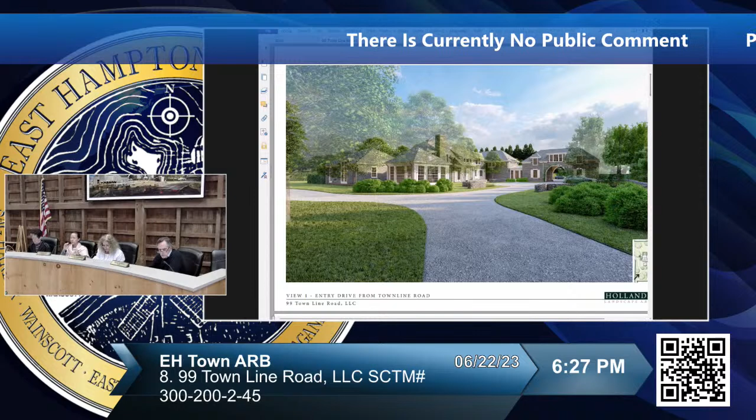I took a photograph of the long driveway, which is completely hedged on both sides. I took it from within the property so you could appreciate the distance to the road. We'll take a look at those pictures. Well, there you go. Thank you, Julie.

There's no curb appeal, as it were, on this house. Right, I mean, I think there's curb appeal, but not that anyone's going to see. It's not a public vista.

Unfortunately, over the years, all of these expansive fields have been built on and hedged and screened, and that's not left. All the tall screening, for the most part, on this property is not ours. Right, it's neighboring properties, correct? It's neighboring properties.

In fact, looking south, much to probably my client's chagrin and their friends - same landscape architect - they used to have, this house used to look at the ocean, which is probably why it was oriented and built the plantation type that they put up before, looking that way. But then that friend put up 30-foot trees and took away all of that, which is part of the reason we're turning the orientation of the house.

If you could just, because it's important in a way to me, start with what the existing house is, because that was very much why this house kind of looks the way it does. So, yeah, this is the existing house, Diane was asking me.

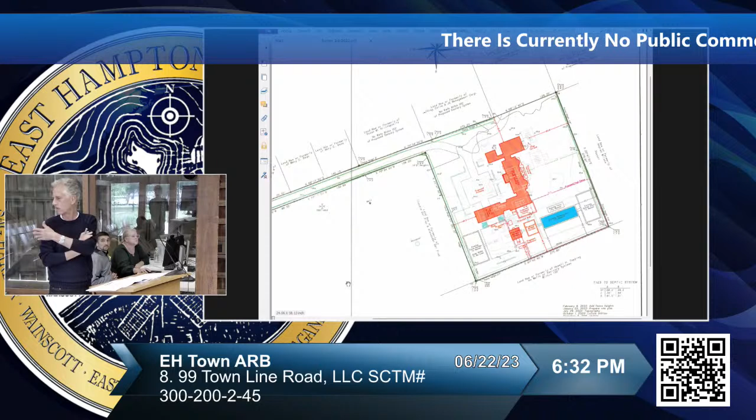No, it went through the lawyers, let's put it this way. There was something that was tied to the family that went away, and it's all documented, et cetera. I know that. Do you have that documentation? Yeah, you'll need to submit that for us. No, and we didn't go into it anyway.

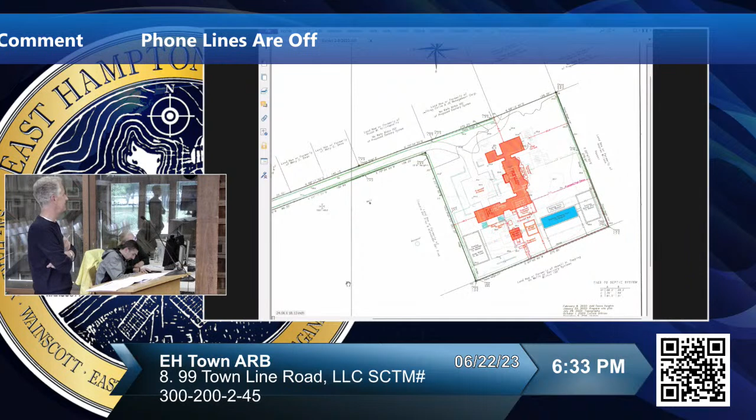So we still kept the view corridor through, in any regard, because we didn't want to push that way at that point either.

So the house, from our point of view, was to ramble much more because the other house was this one large block. And we wanted it to feel primarily much more one-story than two-story. The old house had a 7,600, 5,300 square foot second floor. This one has a 3,700 square foot second floor.

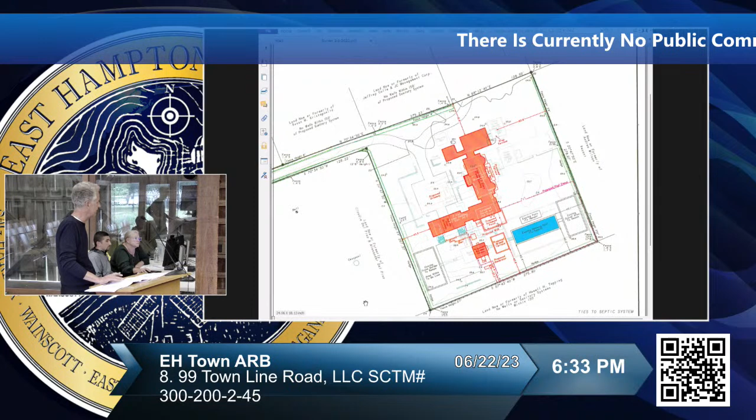So we broke down the massing and did a series of buildings that tumble and connect, playing on an Anglo-American manor house and cottage style architecture language, looking at some precedents. Can we see the elevations, please? Yeah, well, let's take a look at that. I think it's good that we see how you've sited it, but I think we need to move to the elevations.

Should we go to the render? Do you want to do renderings? I think it's a little easier. Yeah, the renderings would be better. Yes, thank you.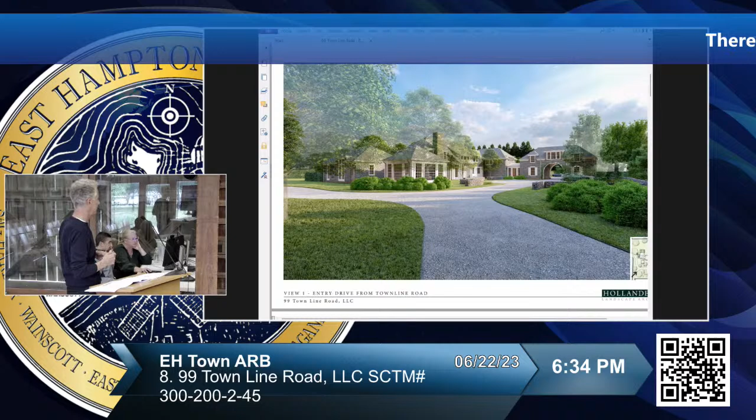Right, so as you come down that long drive, and if you start to veer to the right, this is what you see. So the first two buildings are one-story buildings. It does mass up in the middle and then goes back down again to a carriage house in a U-shaped configuration. So as you drive in...

Should be the next one. Now you've made the turn to go towards the front door, which is on the left, and there is a carriage house, as it were, that's connected to the main house. And it has a drive-through because I don't like to see the garage doors. So you go into a secondary court that has the garage door.

In the front of the house, then turning - I think if you go one more it'll be dead on. Oh no, sorry, maybe. Oh, that's okay - you drive through to the back court where the garage doors are. Let's go through again, it's very romantic.

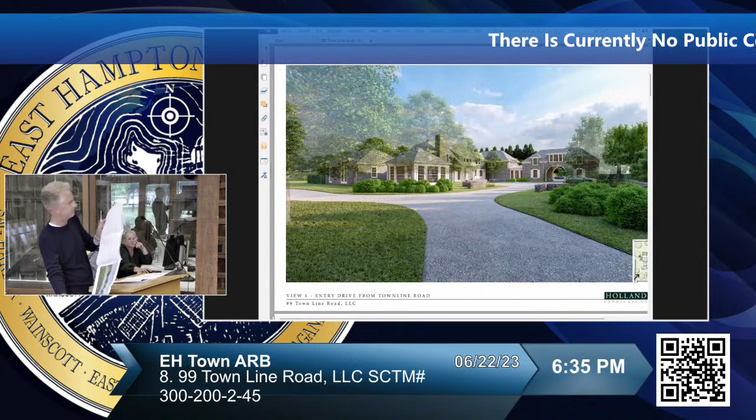Okay, so can you go back a couple so I can talk about the front? I was looking for that one. View, what is the sign? Let's see, view 3? Is it view 3? Yeah, I just found that. Probably me not paying attention to you. There you go, there we go.

So in the front of the house, in addition to try to mitigate that, we brought the roof line down and created an entry porch over the front door. So this is the main entry of the house, and the entry driveway is behind.

You've driven straight down, come all the way down the long drive, and done a right-hand turn, sort of diagonally into the first court.

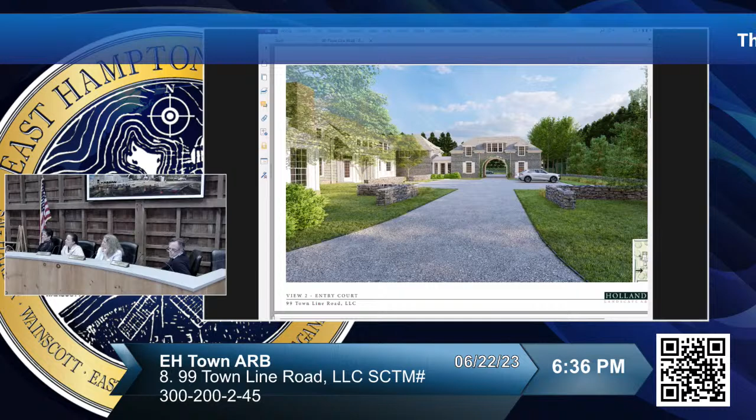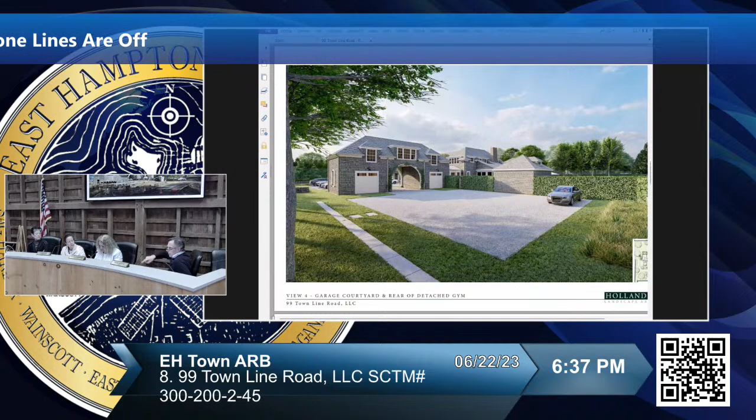We can look at Ed's site plan, that might be helpful. I was looking through the architectural drawings - what is that, sheet A300? There's sort of, it's almost like a moon gate, not really, but kind of like it, of the carriage house. But there's another gate that has a peaked... oh, that's not a gate, that's a section through one volume. Do we have that in the package? We'll take a look at it in a bit.

Is this that I was wondering about? That's a section cut, isn't it? Yeah, okay. I got it. Yes, so you've got the...

There's the very long flag lot drive, and then this gentle sweep around. So you will catch a diagonal view, which is what we tried to capture in that one rendering. You're not seeing the front entry straight on - you're not really ever getting that straight on view unless you park your car here and walk up to it.

There's that beautiful thatched roof house in East Hampton Village - the Johnson house, yes, it's magnificent. I was looking for a device to bring the roof down at the front door of the house without just the typical adding a porch or a pediment over it. So I looked at that house. I didn't want to do a thatched roof house because that's its own house. Well, this has a very romantic quality about it, like that house.

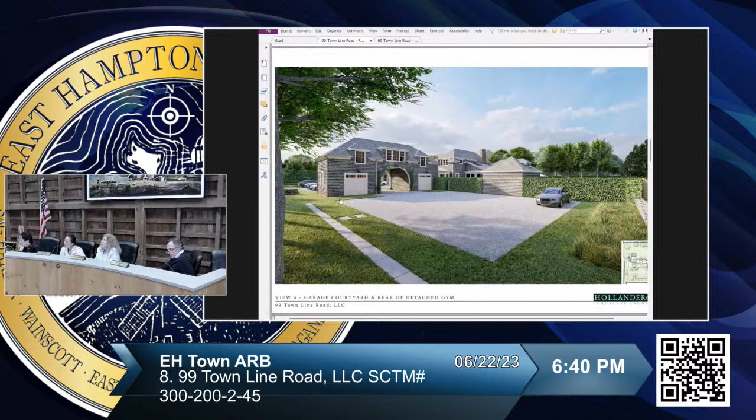What is that? No, not that, the stone wall. I'm wondering in the landscape plan - are you talking about the stone, the tree? This is a tree, that's a stone wall. Are you talking about this? That's actually stone, it's just a grass court. What's this thing?

What's that? That's the Bosque. Over here? That's the Bosque, and there are two existing Bosques. What's a Bosque? This is actually just a stone area, and the stone surrounds a new Bosque over here, existing tree Bosque. What's a Bosque again? It's just a gravel area with trees. Yeah, I don't know if they're all the rage right now.

That's the same - sycamore and plane tree is the same. Yes, I always thought the English plane tree was slightly different than an American sycamore, but maybe they're identical. Platanus, is that what it is?

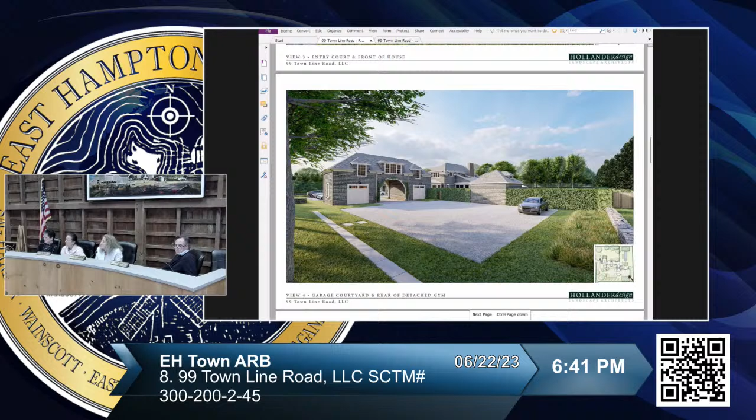So this part is all planted now and exists, and there's the equivalent of it - they're symmetrical right now, symmetrical around the terrace. And they will remain symmetrical around the terrace. Yeah, okay, this is now coming around the side.

So this is an outdoor, separate building - it's going to be a gym, I guess. Just behind that to the right is the parking, the carriage drive. And behind this is the parking service court, as it were. Screen porch - we can keep going.

I have a question for you. Did you prepare this application? I did. So you guys call it a dwelling instead of a residence? Is that just semantics or? I try to tell everybody to use it that way. I hate when you say house, residence. So we try to say dwelling for the house. Just the application with the proposed work says new single-family dwelling as opposed to residence. Okay, so it's intended to be a residence, not just a, okay.

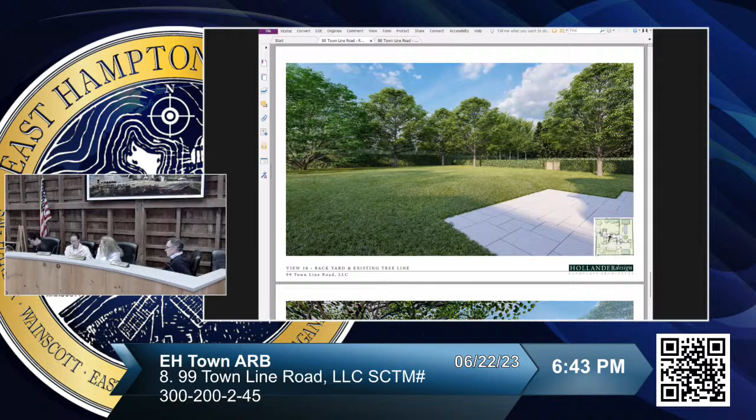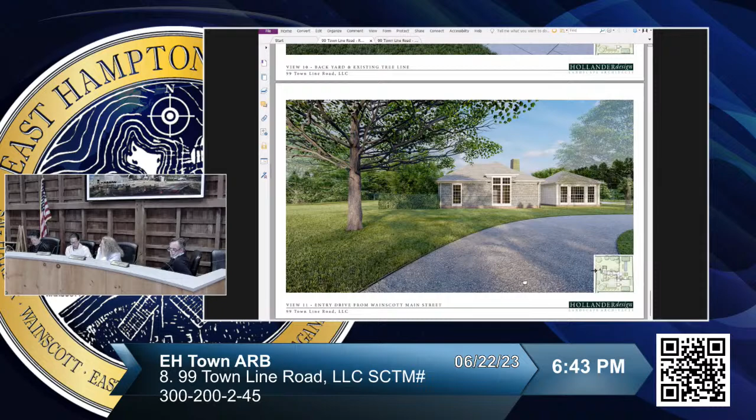2-acre lot, yeah, I'm just showing the screening. And coming back around the side of the house. Now if you were going over towards the guest house. That's it. Okay, let me just look at the site.

So one thing I will mention from the memo from the planner regarding mass and scale. So as we already spoke, we talked about the driveway access, which is this for this flag lot. It's a 500-foot access driveway. As we already spoke about, the public vantage points are not readily available.

It indicates, as proposed, the property complies with permitted lot and total coverage requirements. Lot coverage, as compared to existing conditions, is being slightly reduced by approximately 177 square feet. And total lot coverage is being increased by approximately 1,836 square feet.

Let's see, what else? Is that because of these driveway courts or something? I would imagine, yeah, and the bosques and whatever else, yeah. But do the bosques count as coverage? I guess because they're structure, gravel. Yeah, right, yeah. I mean, there's hardscaping there, right? Yeah.

The proposed single-family residence size is approximately 442.6 square feet lower than that which would be allowed per the residential regulations. The maximum size would be 10,311.6 square feet, and the proposed, as I had said earlier, is 9,869. So it's just roughly 442 square feet below the maximum. So just wanted to provide that additional information. Well, that all jives with the numbers I have in front of me.

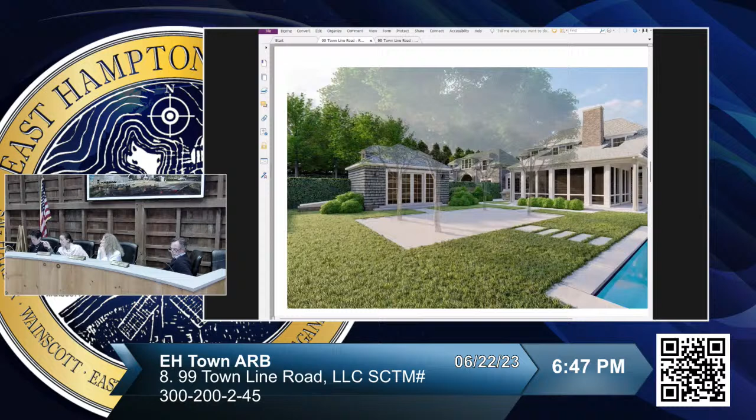Backup house, which if you go back, yeah, I don't, there was a little view of let's look at that and see the windowless side of that building from the one before. Yeah, right, that's there. Yeah, that makes sense. That's the one, that's the taller one. That's 7 to 8 feet tall, correct.

Okay, and there's actually another 6-foot high gate right here to get into the house.

Materiality wise, it's natural red cedar roof and side shingles, just weathered. We use the brick for the foundation that's the same as what I used on the barn chimney, which is a red brown, sort of tumbled, reclaimed-looking brick. It's sort of innocuous in my mind. The flashing, leaders and gutters are lead coated copper, as are the dormers cut into the sloped roof, so they'd be flat seamed lead coated copper. It's what we're using for everything.

And the trim is white. You sure? My client wanted to look at some different colors. I know the color changed on the other house, so that's why I'm asking, because it was white there and it's not white now. Right, so I'm going to guess you might want to emulate that.

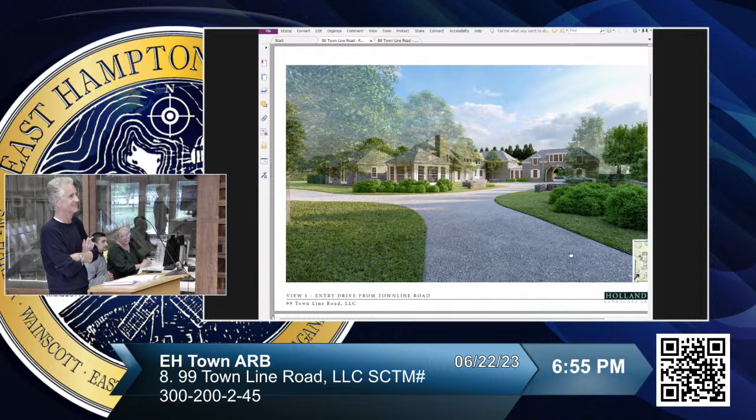Does anybody have... are you done with your evaluation, or do you want to- I don't want to rush you. No, not at all, but these are important things, though it is getting late. I'm always hesitant - I know this is not as sensitive a location as others we review regarding mass and scale, and I know this applicant, the owner, is a sympathetic Wainscott lover.

It is a large development. The landscape plan shows the tie-in between the overlay area. Can you bring it down a little bit, and zoom out? There you go. This shows a certain client has this over here, and there's also 30-foot high trees here and here. This is the only area, and then this is their guest house, so it really is tucked in back there - unless you drive in, you're not going to see this.

Yeah, it's not even- it's not about that, I just wanted to give you a sense of it. No, we understand, it's a long flag lot. That was part of the review.

What we're really trying to accomplish is a very picturesque movement around this house. I think you've accomplished that - driving in and seeing it, I think it's lovely. I really do think it's lovely. I think the materials are nice, I like the way you broke up the different spaces, and I like that the garage doors are to the rear.

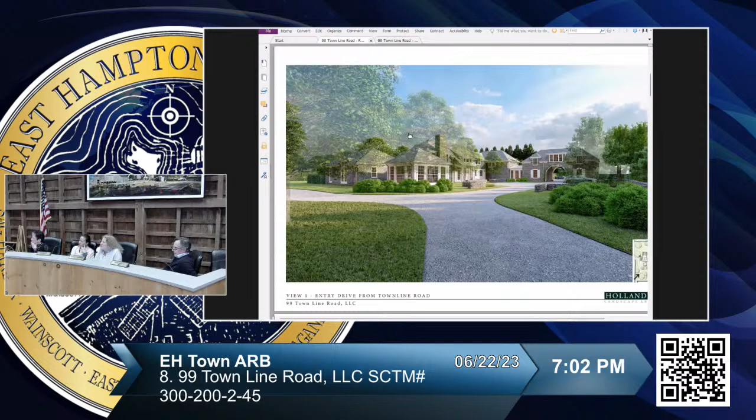Now go back to this previous page. That's the satellite overlay, the big one. No, the satellite overlay, previous page. You were just on it. Yeah, there you go. Okay, just pull it up a little bit more until. Make it bigger, please, zoom a little. Oh no, not bigger, I want to show the whole page with the site, like the east, the north. Oh okay, a little. They have a life of their own. Zoom in just once, zoom in once. Okay.

I like how the building's tucked away. It's in the middle, right of the site, and you're lucky you don't have a long, narrow lot.

So here's what I'm thinking - what is this, seen from Main Street? My criticism, and I don't think there's anything we can do about this, is that it appears Ed Hollander has put up a big hedge. I get the privacy, but my concern is there's going to be this massive long hedge along these two properties as seen from Main Street. I think that's one of the nice things about Wainscott - there are still vistas, and how the landscape flows from lot to lot.

I'm really concerned about what I'm seeing here. Which hedge? Main Street already has a hedge and we're opening up the hedges. It's on the east side, and there'll be that one on your lot. That's already there, that's bamboo in fact, some of it. Continue it on, and this hedge is already there too. It's one thing - I'm really enclosed. I can show my client pictures.

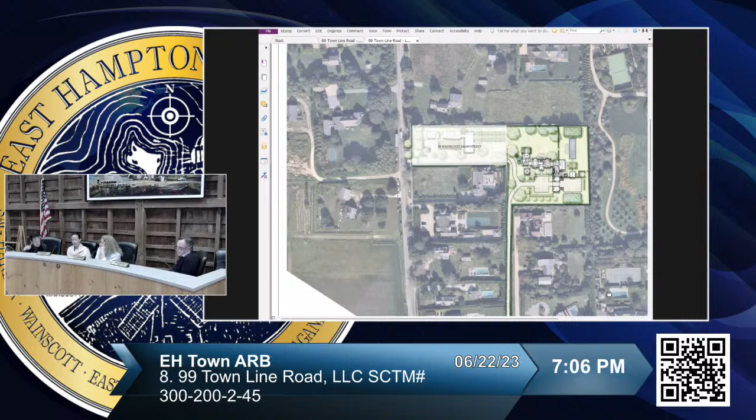Okay, well Mooney, where are we on this? You want one more time, or are you good? I wouldn't want... I feel like I don't want to rush this per se, but I just would like to make sure your application is fairly complete. We haven't even discussed the generator, so I don't want to have to go into that now.

I just would like to know that everything is there, like your lighting specs. Well, you'll need to come back for that anyway, and we'll have to review the generator and the noise outputs for the generator and so forth.

Do you have a below ground level, a basement level? Actually, I have a large basement. It's storage, partially - I found that interesting. It's all mechanicals, no rec room, no theater, no wine, no dog grooming, no ping pong. The only thing he likes is a clean wine cellar, so you can, yeah.

No bunk beds - no, because there's a whole other guest house. You have to remember this client, even in the house he's got there, he's like, basements are basements. I like them clean, I don't like them spidery and spooky, but I don't live in my basement.

I come here because I want to be outside, above ground. Above ground, it's yeah, like, okay.

I would never put anyone who helps me with my... he has 5 children now, I think he's up to 5. Well, because they thought they couldn't get pregnant, so they used a surrogate, and of course, 3 weeks later, she got pregnant.

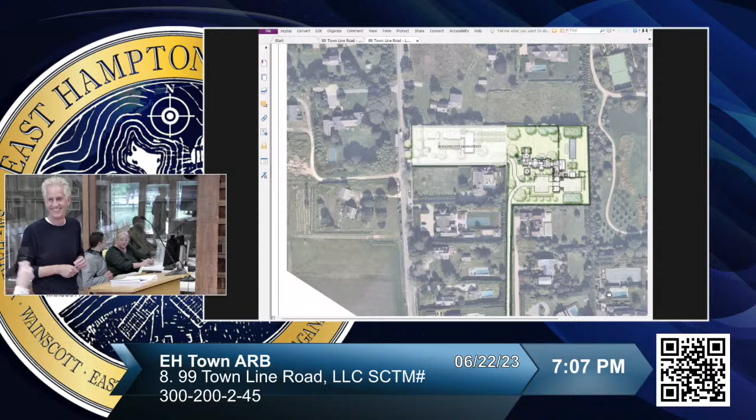The lighting specs are in there. I'm not sure offhand if generator specs are in there. We'll need that, so we'll have the lighting specs. The lighting is from Ed Hollander.

And what about on the house? For the house, Ed Hollander did the lighting. Attached to the house, we have it as well. We will be doing lighting on the house.

I think we've submitted lanterns, et cetera, but probably best, because we've all had a long day. The memorandum says: does existing and proposed lighting comply with board policy? I think it's too late in the day for us to bite into that one.

It'll give us a chance to go back and see, and we'll send you a follow-up letter if we find anything further we need.